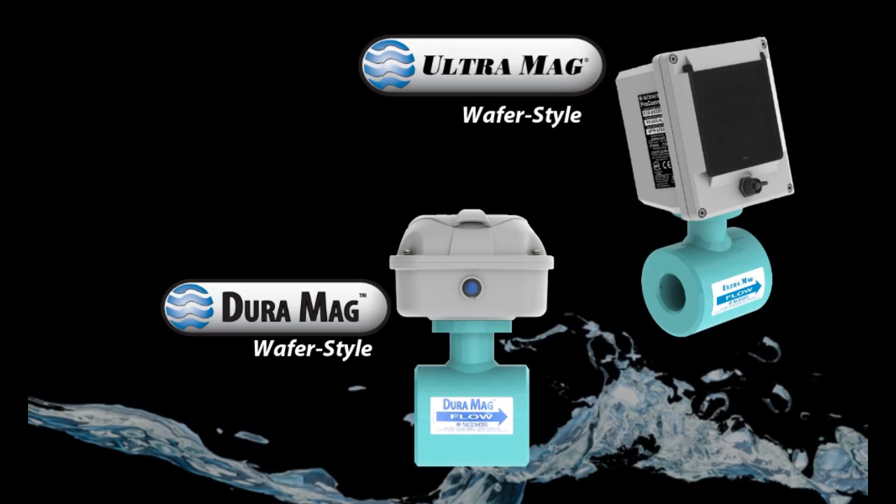We'll be demonstrating how to install our newest product, the Wafer-Style mag meter, available in 2 and 3-inch line sizes. Both the Dura mag and the Ultra mag are available in the Wafer-Style, and they install in the exact same manner. In this video, a Dura mag will be shown.

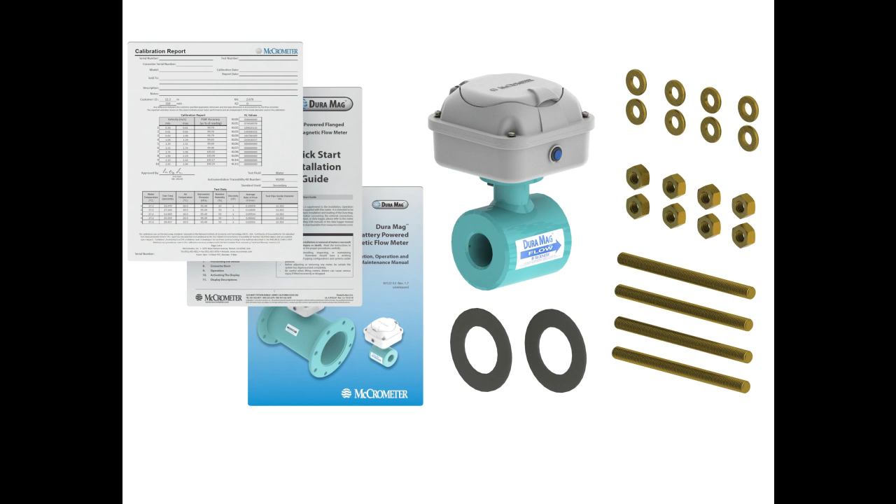Let's get started. When unboxing your new meter, the following items will be included: a Wafer-Style mag meter, an installation, operation, and maintenance manual, better known as an IOM, a quick start guide, and calibration report. You'll also receive the following parts: 4 fully threaded studs, 8 hex nuts, 8 flat washers, and 2 gaskets.

If you have a 3-inch Duramag or Ultramag, you'll also receive 2 clear plastic tubes that you'll need to use alongside the threaded rods. For this installation, you'll need 2 1 1/16 inch wrenches, with the exception of the 3-inch Ultramag, in which you'll need 2 1 1/4 inch wrenches.

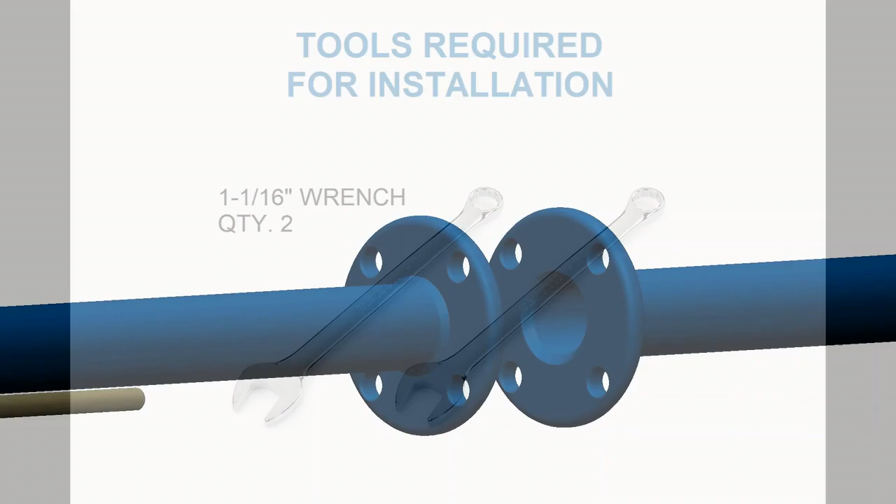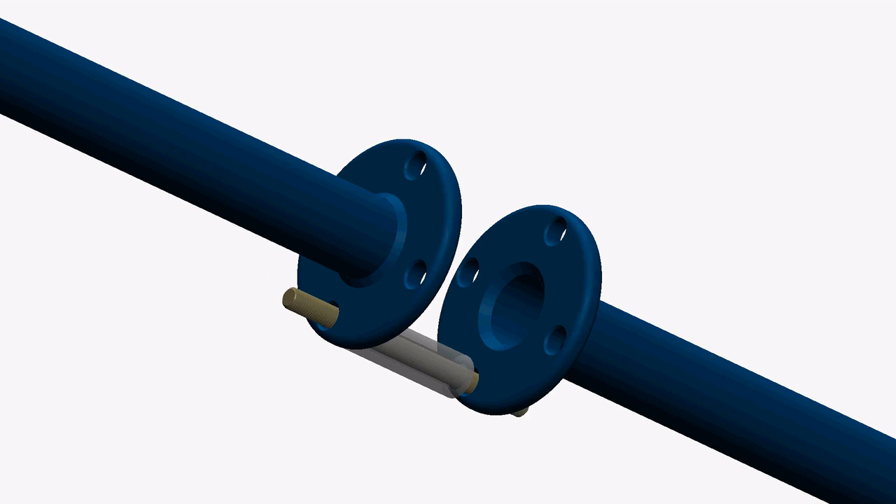You'll begin by first installing the lower 2 threaded studs with washers and nuts as shown. Be sure to leave them loose at this time, allowing the meter freedom to shift if required prior to final tightening. For the 3-inch Duramag and Ultramag specifically, you'll need to insert the bottom 2 threaded rods into the 2 clear plastic tubes prior to placing the washers and nuts onto the rods.

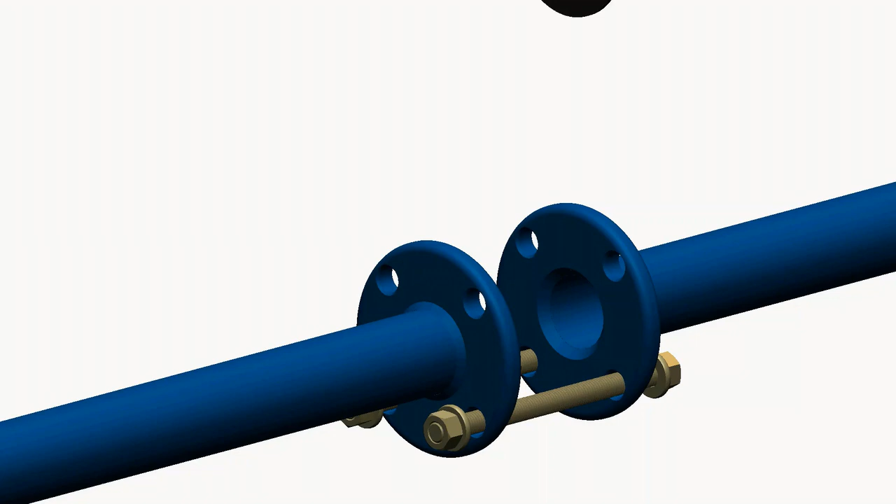These plastic tubes help center the wafer meter along the center of the pipe. If you don't install these with your 3-inch meter, you run the risk of your wafer mag not being centered in your flow. Place the gaskets along the pipe opening. This is required to create a proper seal and prevent leakage.

Wedge the meter between the 2 gaskets, ensuring the flow arrow is pointing in the correct direction for the process. Rotate the meter if necessary, so that the converter is upright. Install the upper 2 threaded studs with washers and nuts as shown. Tighten all nuts, securing the meter in line in a crisscross pattern.